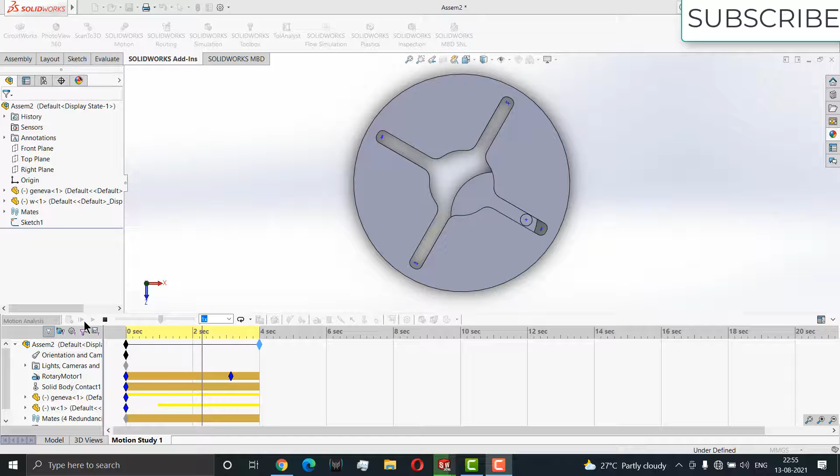In this video, we are going to make this internal Geneva mechanism in SolidWorks. So here I open the part.

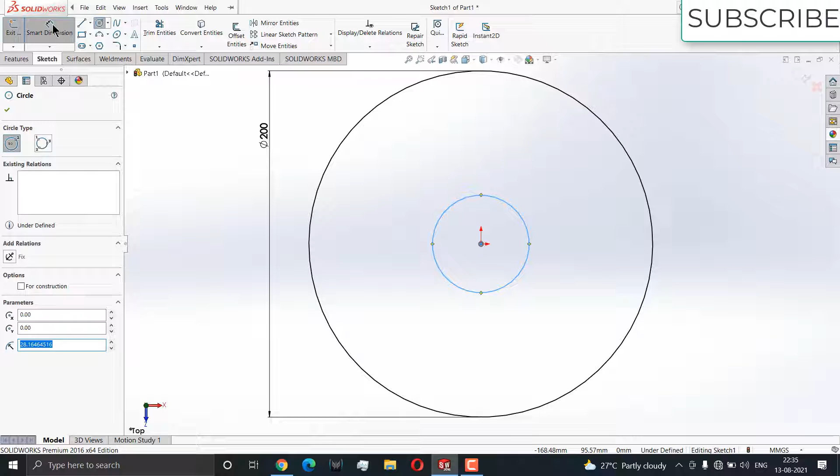First, select the top plane, click on sketch, and draw a circle as per your requirement. I'm making a diameter of 200 mm, but you can make it as per your requirement. After that, draw another circle, let's say its diameter is 60 mm, and we need to draw some corner rectangles, or you can draw center rectangles as well.

Now go to fillet. Before I apply the fillet, let's give some dimensions to it. This is 12 mm, and from here to this point it is 60 mm.

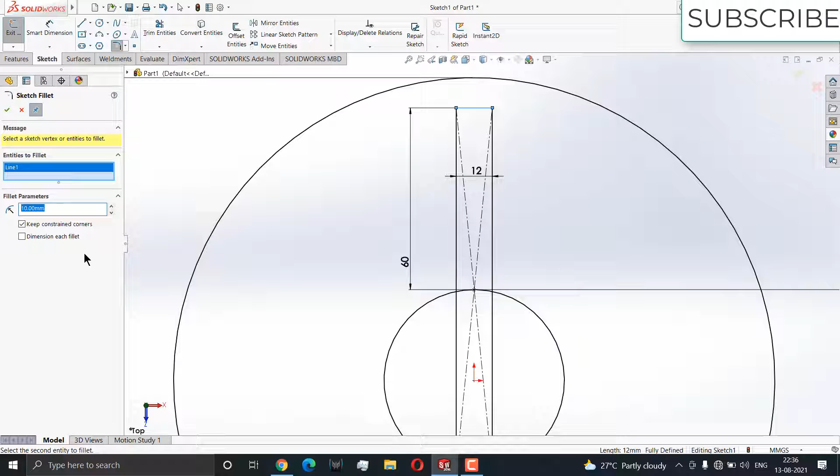Now go to the fillet, give it a fillet radius of 6 mm... okay, 5 mm. Click OK, click OK. Now click on trim entities, trim this line and this line as well.

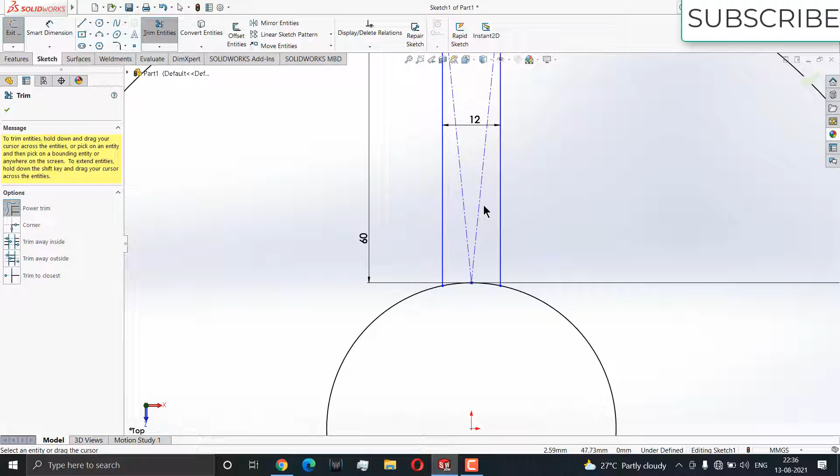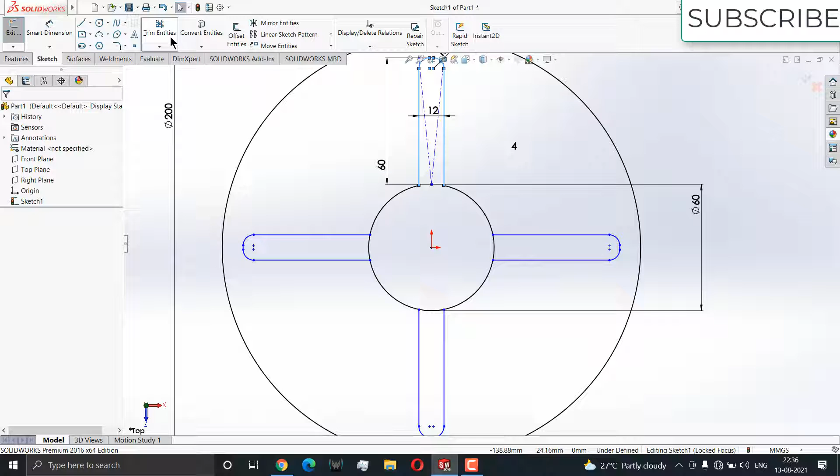Trim this line. Now go here, click on circular pattern, select this point. Select entities to pattern, select this sketch. We are going to make a total of 4. Click OK. After that, click on trim entities, trim these lines.

Go to features, click on extrude, extrude up to 10 mm, click OK. Now the other part we are going to make: first select this face, press Ctrl plus 8.

Now we have to make another part that goes inside of it, so it needs to fit properly and our mechanism works properly. So go here, sketch, select this face and click on sketch. Since I'm making this mechanism for the first time, I'm trying to do everything, like calculations and other work, from scratch.

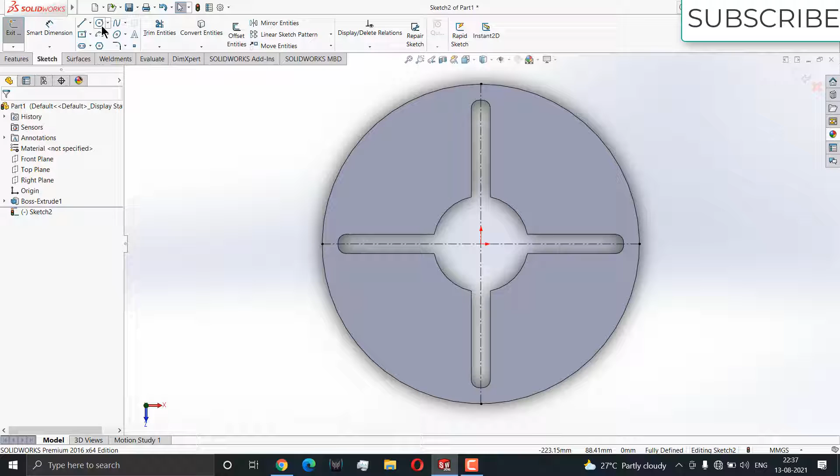I want my mechanism to fully rotate here, so I can use a 3-point circle. I want my circle to cross here, here, and this point. Let's say... don't go too far, okay, this one.

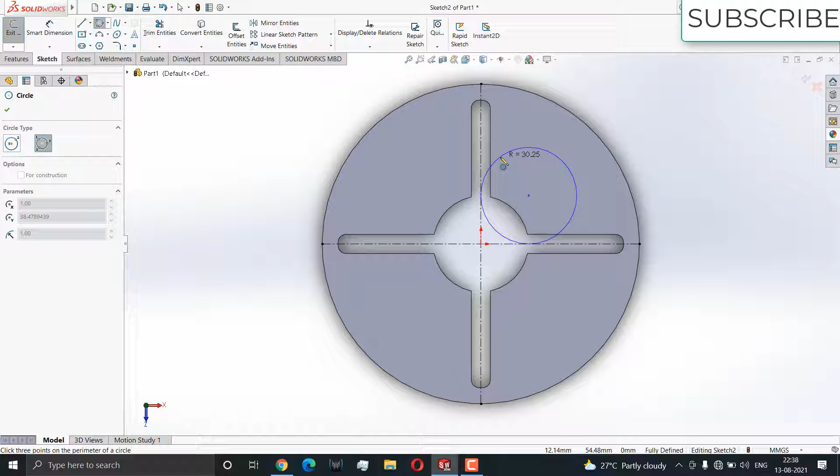Give it a diameter, let's say 60 mm — yeah, 60 mm looks good. Now go to smart dimensions. It is 30 mm from here, and 30 mm from here, okay, and its dimension is 60 mm.

I'm going to use this in my other part. Remember, I'm making everything from scratch here — I don't know any dimensions, I don't look at any dimensions from the internet, I'm making everything myself from scratch. I'm doing the research part as well, for example, what should be the diameter.

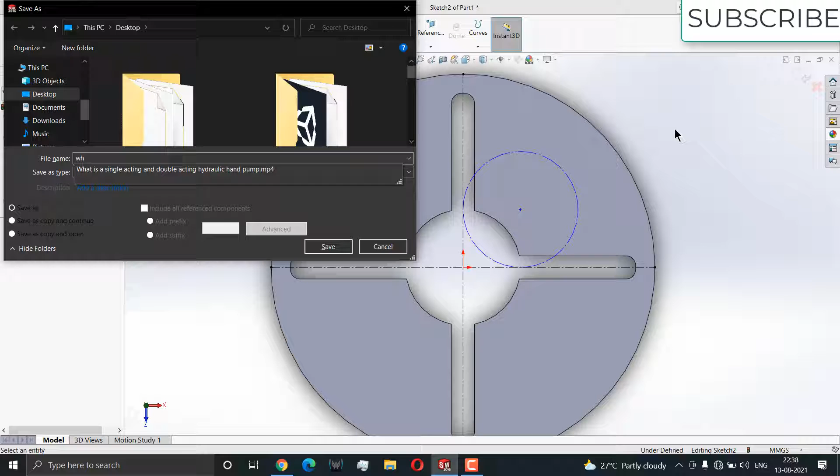So first save this part, press Ctrl plus S and save it as W for wheel. Click yes. Now click on file, new, click on part, click OK. Select the top plane again, now click here, center point.

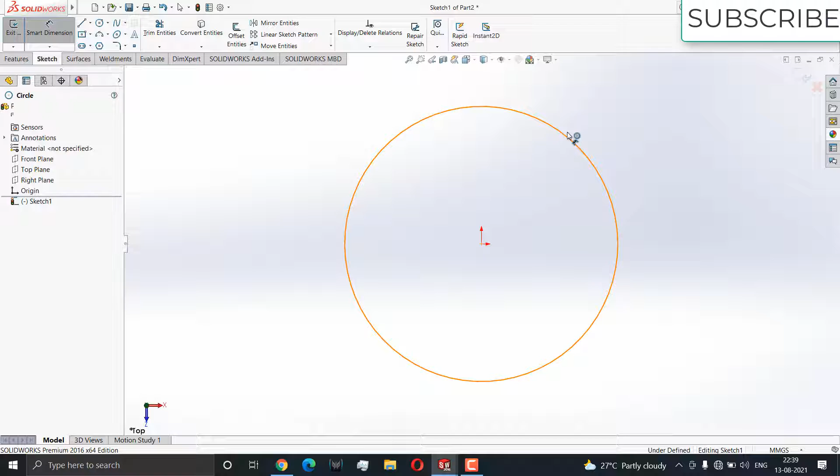Click here, click on circle, draw a circle here, let's say diameter is 80 mm. Extrude it as per requirement — 10 mm is okay. Select this face, click on sketch, press Ctrl plus 8.

Now draw again a circle, but this time it is 60 mm diameter — that's right, we have used it before. Sketch dimensions, yeah, 60 mm, so we are going to use it.

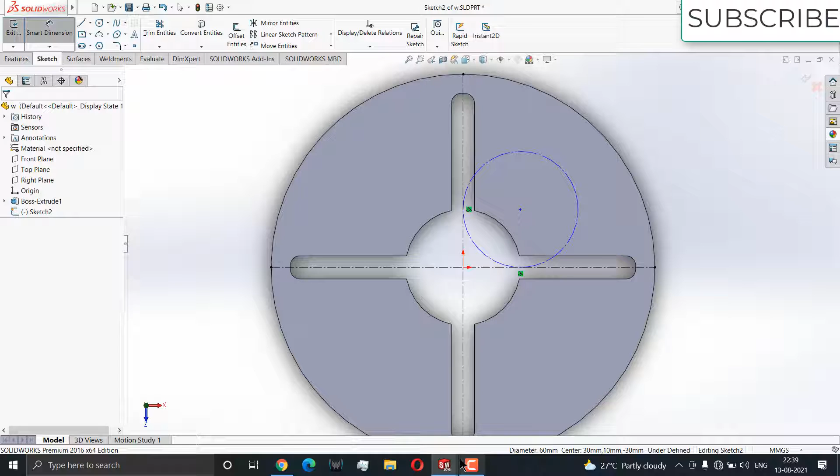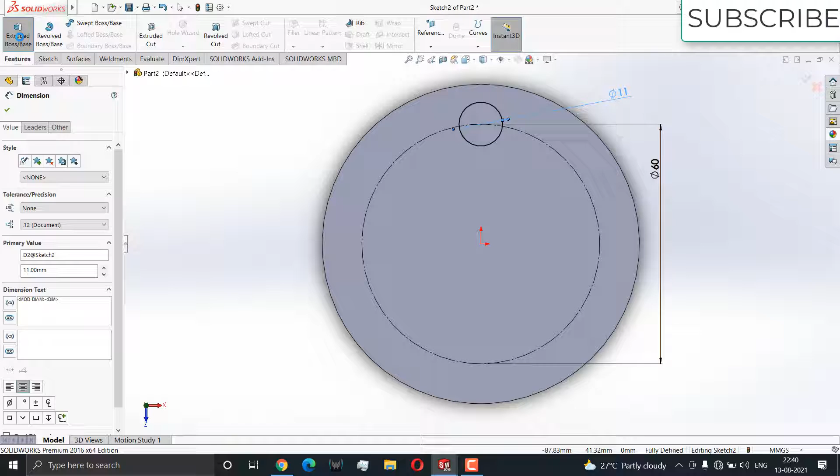First, press escape, select this line, make it construction geometry. Now draw a circle here. If you remember correctly, the slot is 12 mm, so let's make it 11 mm and extrude it to 10 mm. Click OK.

Now press Ctrl S and save it as G for Geneva, or whatever you want. Now click here, click on... so let's first import these two parts.

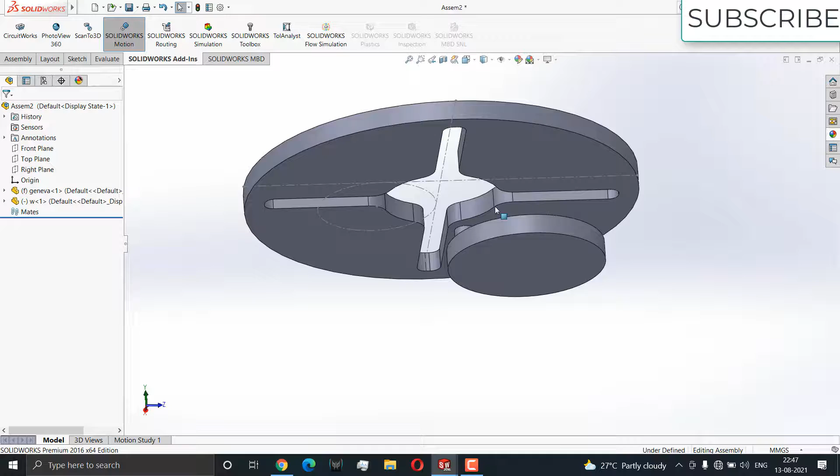Link is in description. Now let's start with this assembly. First thing we have to do is click on this view on temporary axis.

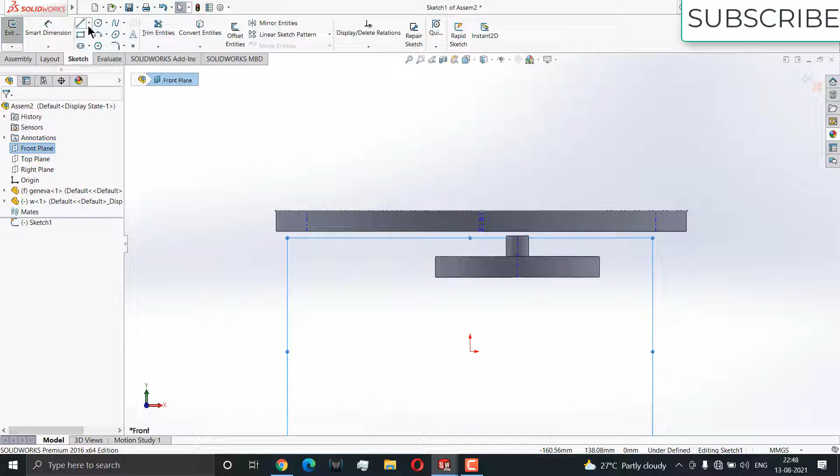So first I have to make them. Select the front plane, right click on it, sketch, press Ctrl plus 8, draw a simple center line and escape, click OK. Click on mates, select this line and this line, click OK.

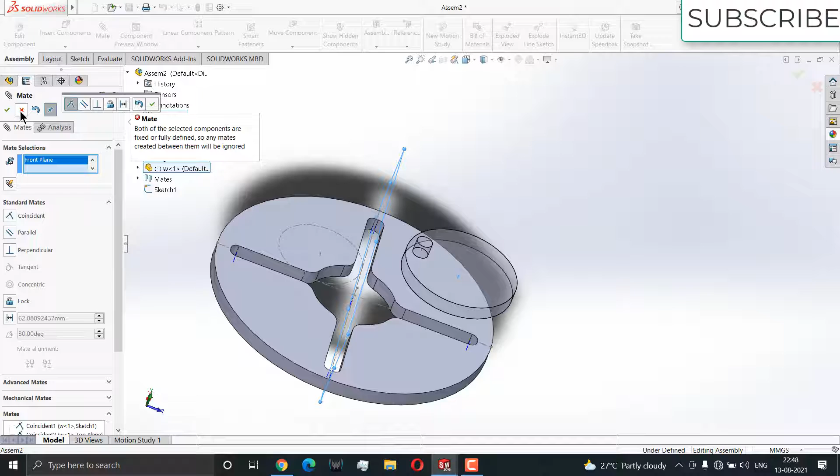Select this face and select the top plane, click OK. Now select this face, select the front plane. As you can see, I'm getting an error. The reason is that whatever part is imported first in SolidWorks is always fixed.

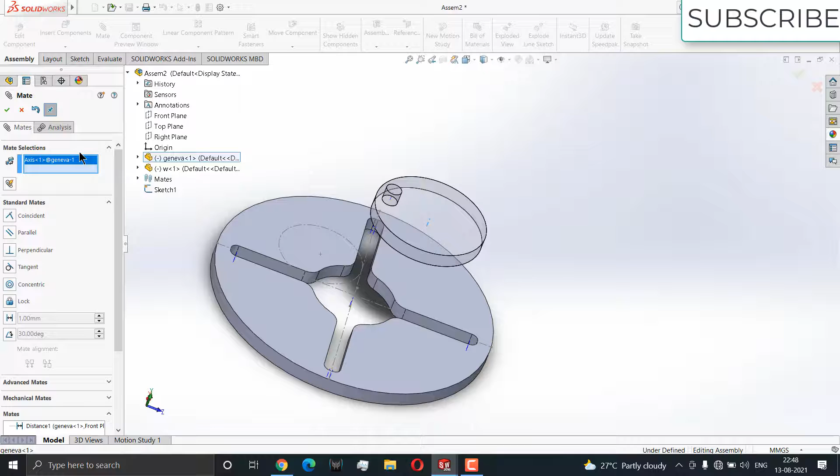So right click on it, click on float — now I can move it. Click on here, select this face, select the front plane, give it a distance of 30 mm, click OK. Select this face, select the right plane and give it a distance of 30 mm.

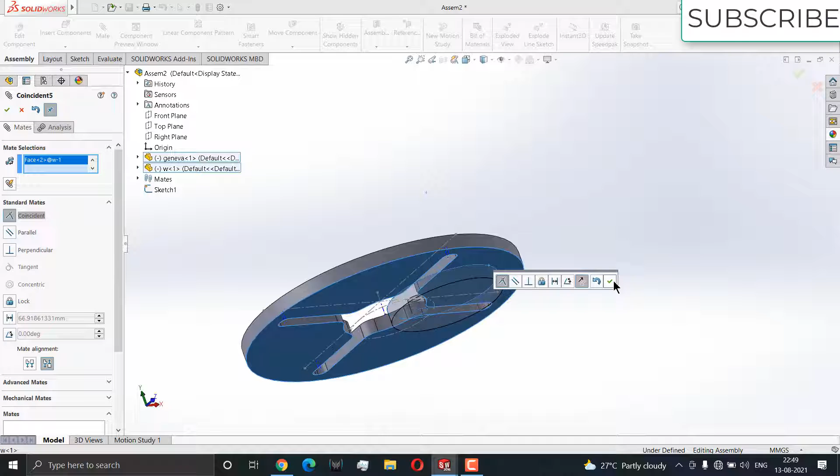If you remember, I explained why they are 30 mm — remember this sketch? Yep, that's what I'm using. Now select this face, go to mate, select this face and this face, click OK. One more thing, I've added some simple fillets here, nothing else.

Select this face, press Ctrl plus 8. Now I need to do animation here, so go to SolidWorks add-in, click on motion, and motion studies.

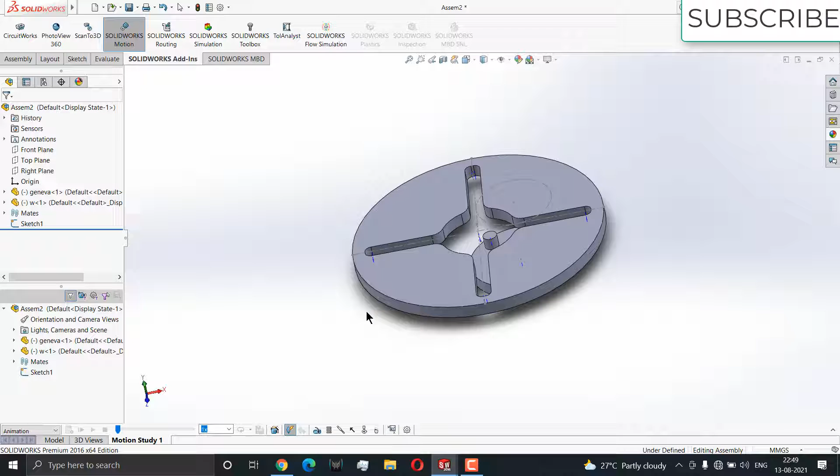If I try to use animation, it will not work properly — just so you know, I'm showing this for educational purposes. Click on calculate... you see it's not working. That's the reason we don't use animations; we normally use motion analysis for better results.

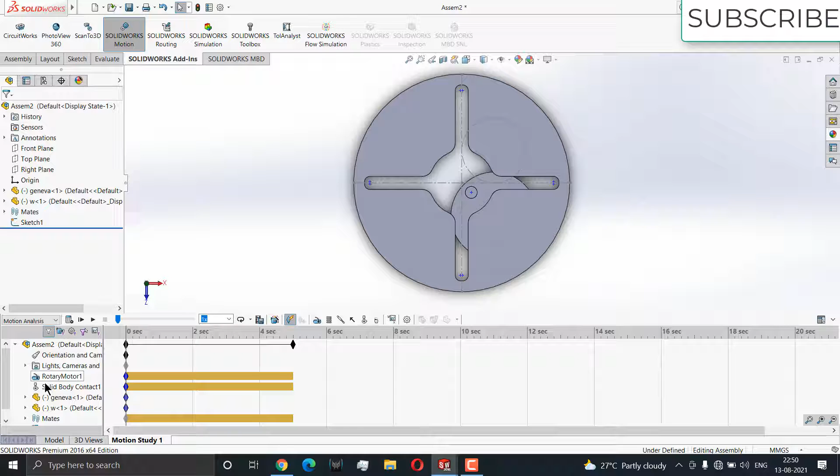Click on contact, solid body contact, select this one and click on this, select this one, click OK. Now go to the back, click here, click on edit feature, leave 20 rpm, okay, and click on calculate.

I guess we need to fix something — click on it, first go back, right click, click on edit feature, reverse direction, click OK, click calculate. Yep, it's working now, so you can make it in that way.

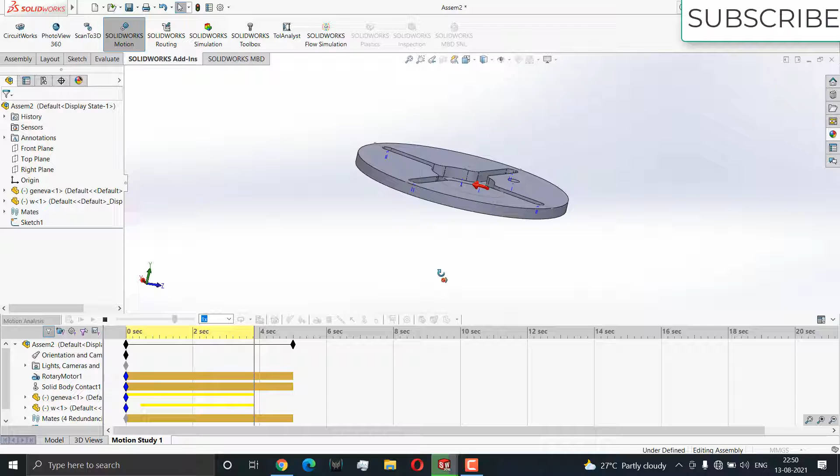Increase this timeline to 8 seconds, and calculate.